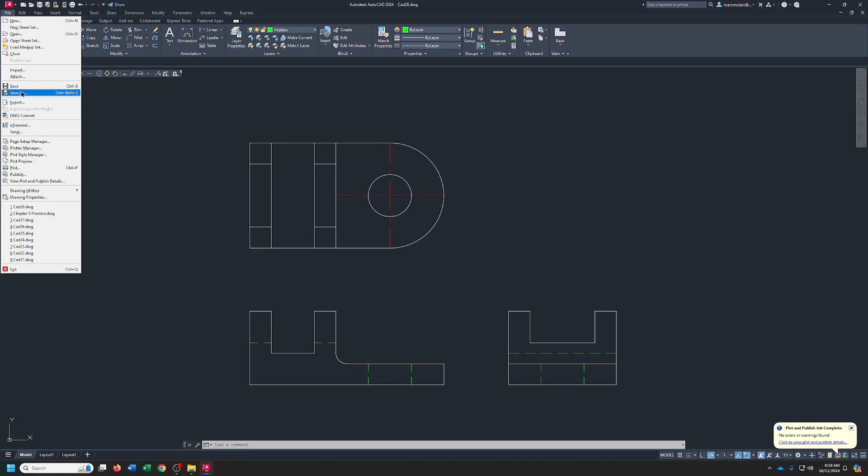So we come up here once again, go to the A, and then the fourth one past the A, save as. Or you can just click File and get down to Save As, or you can hit Control-Shift-S. Any way to do it, but do a save as and call it CAD29. So we'll just change this, back it off one, CAD29, ta-da. Now we can just erase everything. And we'll start over. Now, I'm going to show you some faster and easier ways to do this, okay?

You look at your problem and you start thinking about what shapes do I need to put this together. So I'm looking at the anchor base, and I want to do the front view first. Now, the front view, once again, is looking from the bottom left towards the part. And I see that I have 4 inches wide and 1 inch deep. And then the other thing is 3.5 inches plus 1, so it's 4.5 tall and 1 deep. That looks like a couple of rectangles, right?

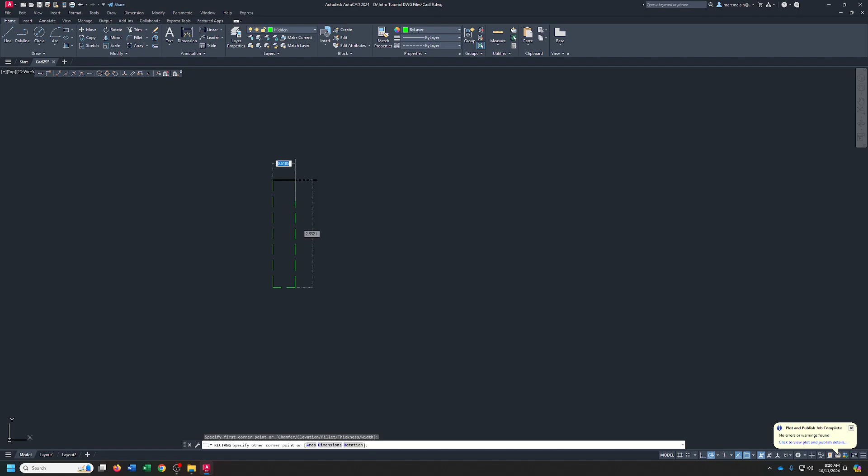So what I'm going to do is I'm just going to use my rectangle command. All right, do that. Oop, get on the correct layer. Always make sure you start on the object layer. And we'll do this. So our bottom number is going to be 4. And then we'll hit Tab, and our side number is going to be 1. And we'll hit Tab again. All right, so that's got that.

Now, I need one right in the middle going up. From the bottom, 4.5 total, and from here, 3.5 total. So what I'm going to do is I'm just going to draw me another rectangle over here. Now, the bottom one's going to be 1. Then I'll hit Tab, and the side one's going to be 3.5 because that's my total height from the top line to the very top.

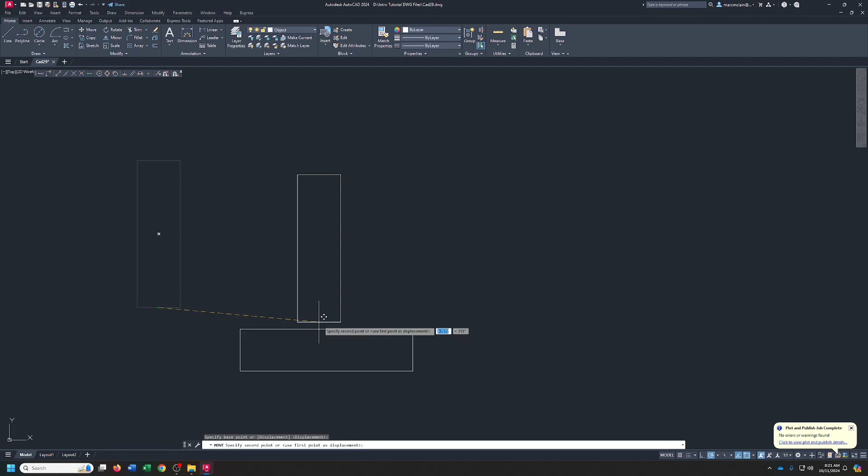Now I'm going to grab that, and I'm going to move it. And I'm going to grab midpoint here, and I'm going to put it on the midpoint there. Okay? Now I'm going to grab both of these and explode them. So now they're individual lines. And I've got one extra line here that I can delete. Hey, my front view is pretty much done.

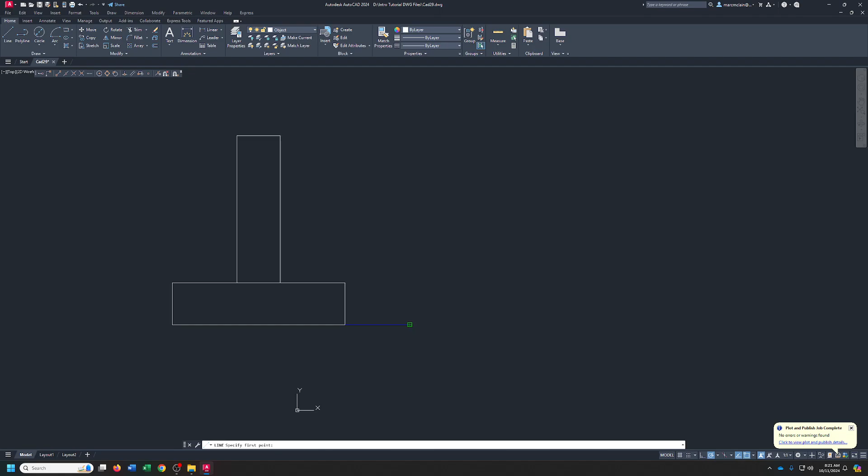All right, so we're going to get the side view over here. And once again, I'm going to change to the construction layer. Okay? Then I'm going to come over 1.5. Now, if I look at the side of this thing, it is 5 inches long. Okay, so I'm going to go ahead, change back to object. So I'm going to come over 5 and then go up 3. And that'll be the center of my 2 circles.

Okay, now this is going to come up 1 on this side because it's got to be the same height as that. So we'll just line up with this. And it says on the side that this goes back 3 inches. So we'll go back 3 inches and then we'll come back down to the bottom. All right, so there's that, right? So that was simple, and this has been pretty simple so far too.

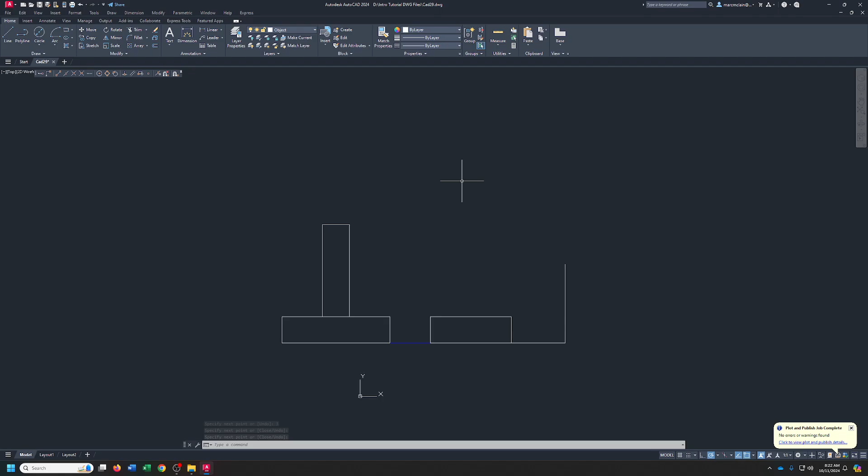So we got a diameter in here. So we'll click circle diameter, and that's going to be 1.75 diameter. And then it's going to have a circle radius on the outside of that that's 1.5. So we'll do 1.5. Okay. Remember our little toolbar right here. If you don't have the toolbar, click Tools, Toolbars, AutoCAD, Object Snap. Okay.

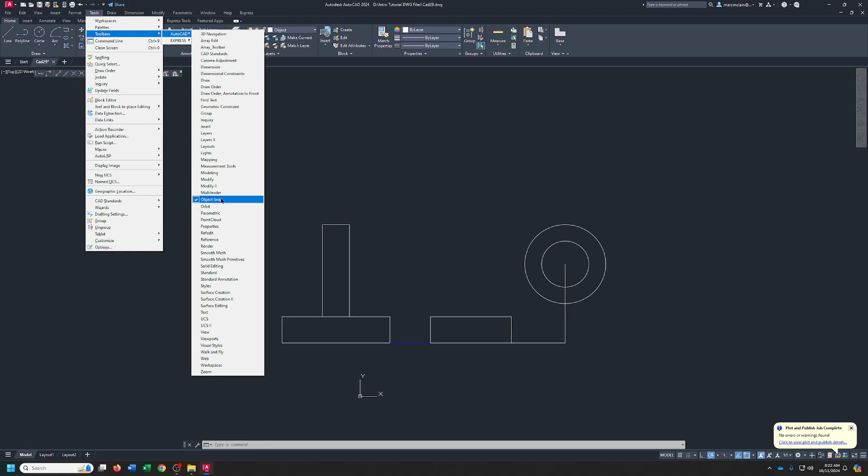We're going to do line, and we're going to start here. Now I want to go to the tangent point of that, so I'll just click tangent, and then I'll pick the circle. And it doesn't matter where, just somewhere on the side. And we'll do the same thing. So we'll start here at the corner, tangent to there. Now I can erase this line, and we can trim the circle. So there is my side view, okay?

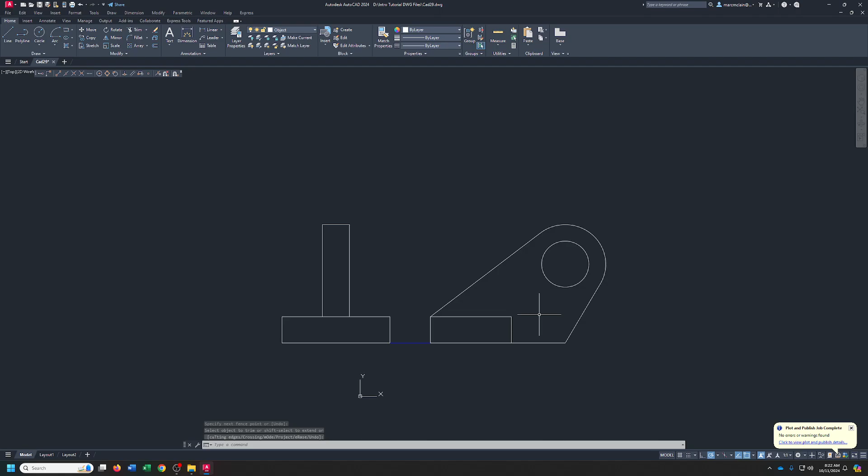Now, I've got this. We're going to need center lines for that, right? We'll do that in a minute. In the meantime, back to object line. We're going to line up with this and line up with that. And see where it snaps? We're going to click there and go up 1.5. That's where we're starting this one.

Now, we got another rectangle here. We're going to start here, and it's going to be 4 across. Don't forget to change to the object line layer. It's going to be 4 across this way and 3 that way. So our top number is going to be 4, tab 3.

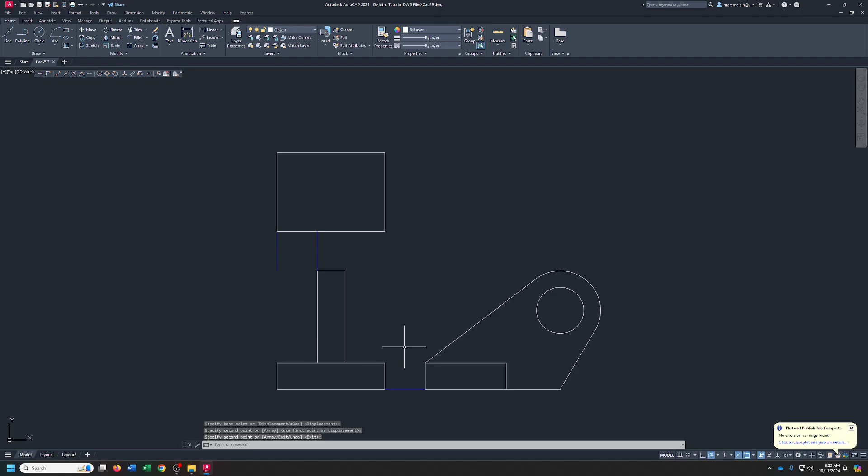All right, now I'm going to grab this and copy it from here to here. That's my start point. Now, from this point all the way to that point, that's 5 there plus another 1.5, so it's going to be 6.5 from here to the top.

So I'm going to start with another rectangle. Top number is going to be 1. Tab 6.5, and there we go.

Now I can erase these 2 helper lines and this one, don't need them anymore, and then I'm going to grab these 2 and explode them. Delete this line and trim this one out.

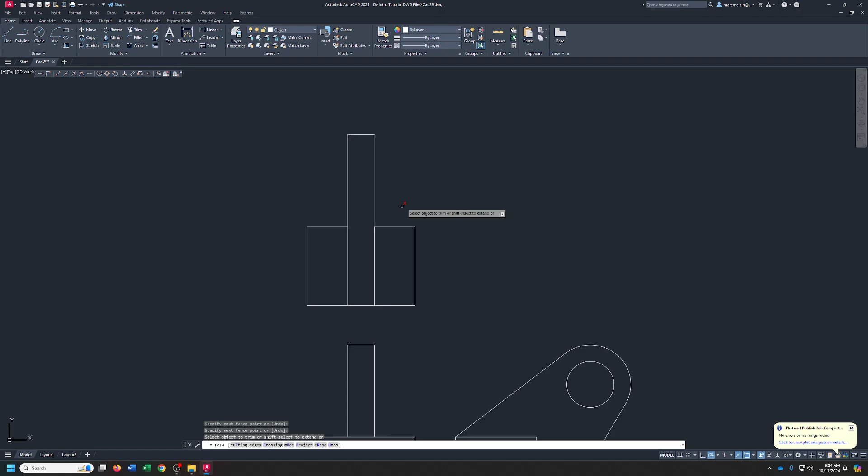All right, now we got 2 holes and we got to have rounded corners. Let's do the 2 holes first.

I'm going to offset, and the depth from the front to the center is 1.5. And I'm going to trim that out right here. Now I'm going to offset 0.75 here and here.

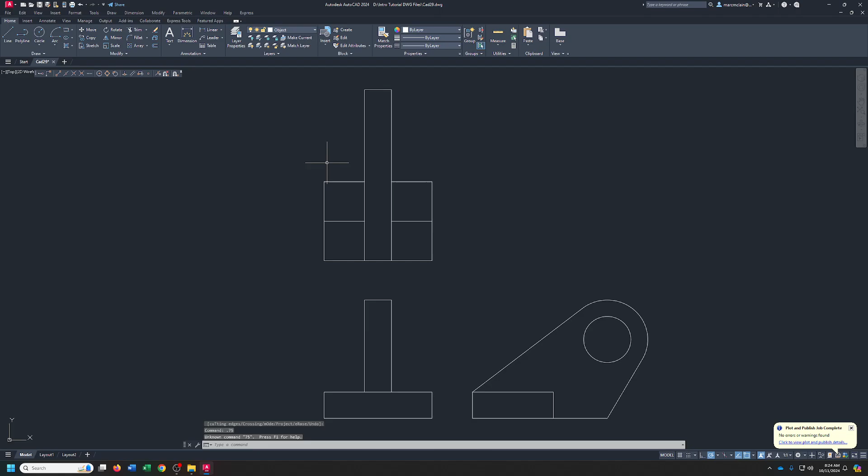But another thing that I can do that would actually be better is rotate. So I'm going to click rotate, pick this object, pick the center, copy, go straight up.

Okay, now I'm going to grab that one, copy it from here to here. Now I've got my center points for my circles, and I can grab those and change them to the center layer. So there's my center points.

Now the circles are diameters of 0.75. So center diameter, draw the first one, 0.75, grab it, copy it, middle to middle. So that's got my holes.

Now all I need now is my fillets. So I'm going to do 2 fillets of 0.75. Fillet, right click, radius, 0.75.

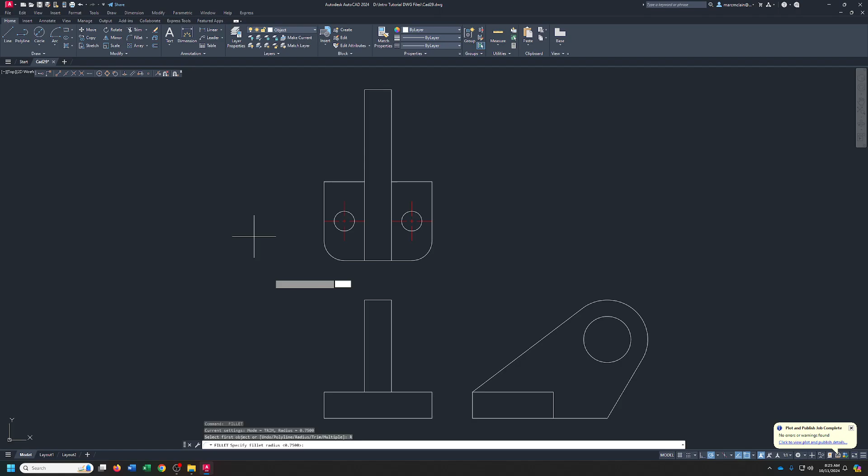Do one here, hit your space bar, do one there. Hit your space bar again, this time right click and go to radius and set it to 1. We're going to do one here, space bar, do one here.

Now, I need these lines to go back down to there. So I'm going to come up here to trim, and I'm going to click the arrow beside trim and go to extend. I'm going to pick extend, and I'm going to pick there, and then pick again here and here. And that re-extends my lines.

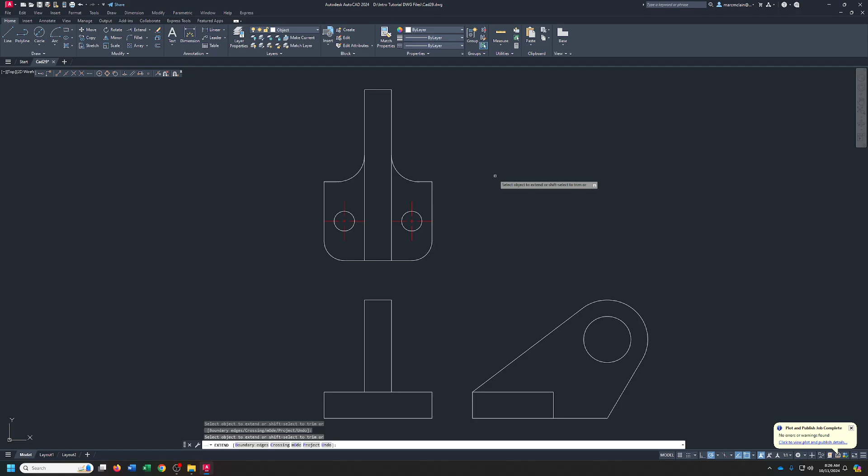Okay, so I've got my 3 basic views done. Now I got to finish getting my lines in.

So I know that this is going to be a radius of 1.5, so it's 1.5 here, 1.5 times 2, which would be the diameter, would be 3. So change to my center layer, drew a line from

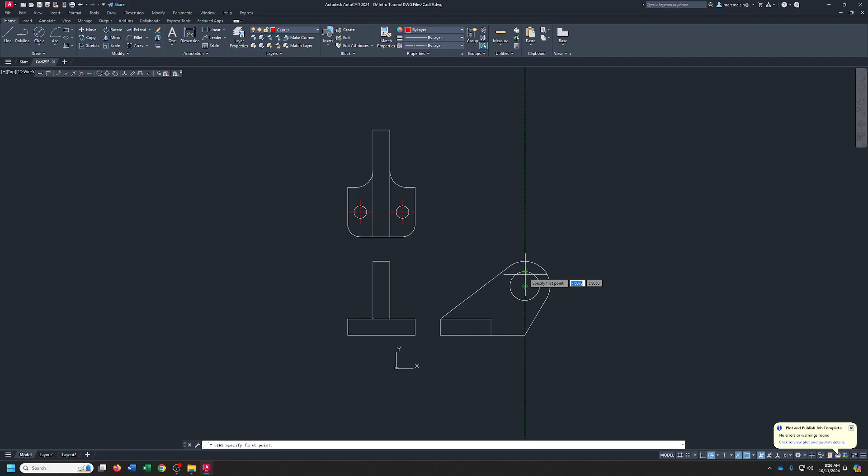Right there. So I'm going to hit there, and then I'm going to let it give me that green line, and I'm going to go up till it clicks on that and come down 3.

And then I'll grab that, rotate, pick the center of the circle, right click again, copy, and go up to the top. There's my center line for that. So now we're done with center lines.

Now it's time to do hidden lines. So let's change to the hidden layer. Once again, you're showing that these holes go all the way through. So keep it green and do that one.

Now, instead of drawing each one individually, go ahead and pick this, copy, pick, and then pick each side of the circle on both sides. And that gets them.

Okay? Now, I'm going to offset, and then I'm going to pick the edge of the circle and pick the line here. That sets my distance, so I know how far this is going to go.

Okay? Now I can change that to the hidden line. And while I've got it, I'll hit copy, and I'm going to pick this green and then go to that green, and now I've got that hidden line for the hole that comes through this way.

Now I need the one coming across here, so we'll go line up, drag it over, keep it green, click when you get the green X. And we can grab that, copy it from the bottom to the top.

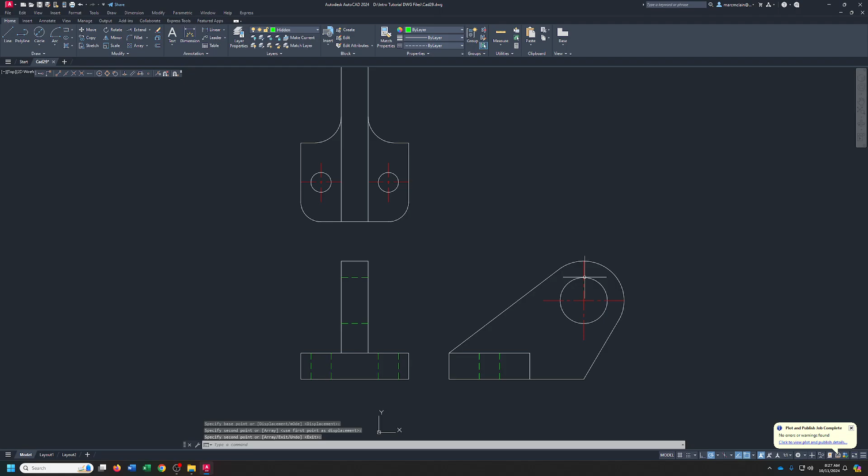And once again, this distance is the same as this distance, so we can just copy this, pick your top right corner, and go to your top right corner.

Click, center your print. And that is Cad29. Nothing to it. We'll go ahead and save that.

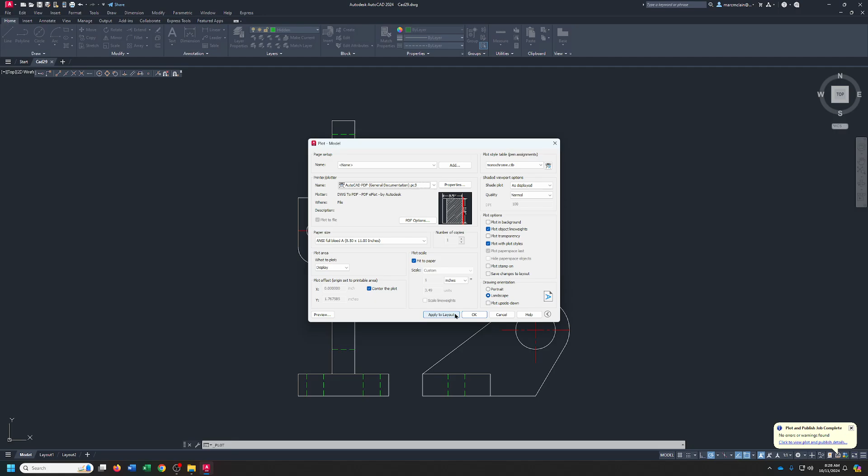Cad29, print. Don't forget to change that to monochrome, okay? If it's not monochrome, make it monochrome, and then change this to AutoCAD PDF. Do your preview. Everything's in black and white, no colors, which is the way we want it. Click your plot again.